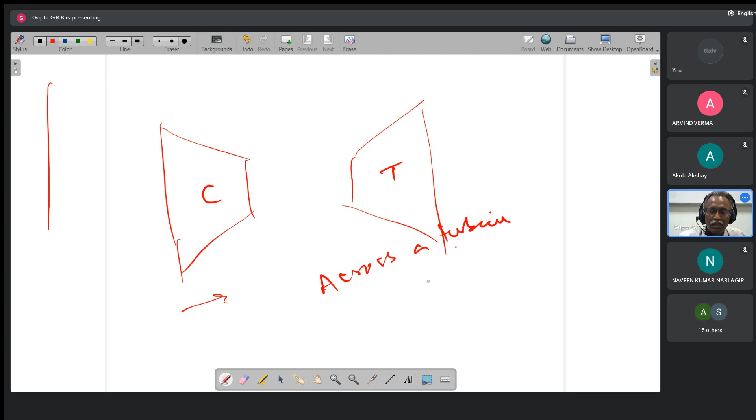So what we have seen is, across a turbine, the area increases because pressure is decreasing and density is decreasing, meaning area will be increasing. And across a rotor, pressure is decreasing and relative velocity will be increasing, so area will be decreasing. Okay, this is the way it comes.

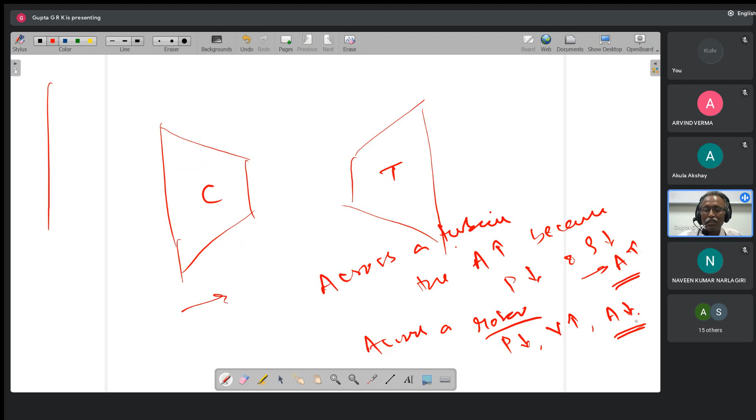Okay, so coming to the velocity triangles, many times we are doing it. So what we do is I am combining the velocity triangles. The base will be the same, so this is U. The large velocity is coming out from the nozzle with C2, and V2 will be like this. So if I complete the triangle like this, the height of the triangle is CA.

So the angles, this is beta 2 for V2, and for C2 this is alpha 2. And if you see the lengths, whirl velocity, this is VW2, the whole one is CW2. That's why U is equal to CW2 minus VW2.

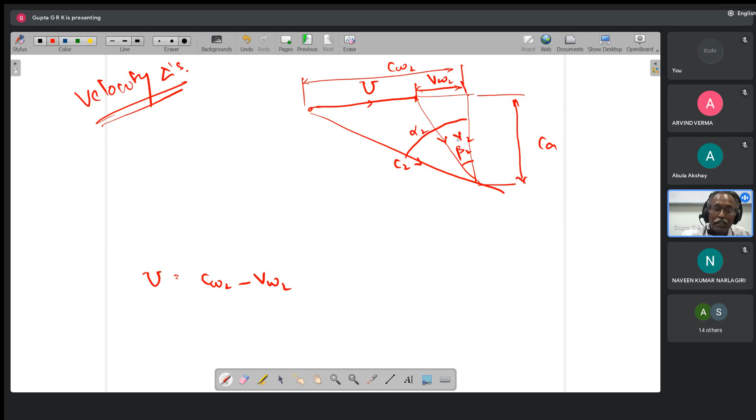Okay, the exit triangle, V2, the relative velocity increases, right? So V2 will be large and V3 will be large and C3 will be small. So V increases, C decreases. And again if I complete the triangle like this, the height again is the same, this is CA only. And again if I take the angles, this is beta 3, the V3 angle, and C3 angle is alpha 3. And again if I see the whirl components, the small one is CW3, and the larger one is VW3. So VW3 minus CW3 also is U.

So from this we can see that CW2 plus CW3 is equal to VW2 plus VW3. If I divide by CA, so U by CA, that is 1 by phi, is equal to U by CA, and CW2 by CA is tan alpha 2, and VW2 is CA tan beta 2. This is equal to tan beta 3. If V is there, beta will come. If C is there, alpha will come. Minus tan alpha. In the same way here, tan alpha 2 plus tan alpha 3 is equal to tan beta 2 plus tan beta 3.

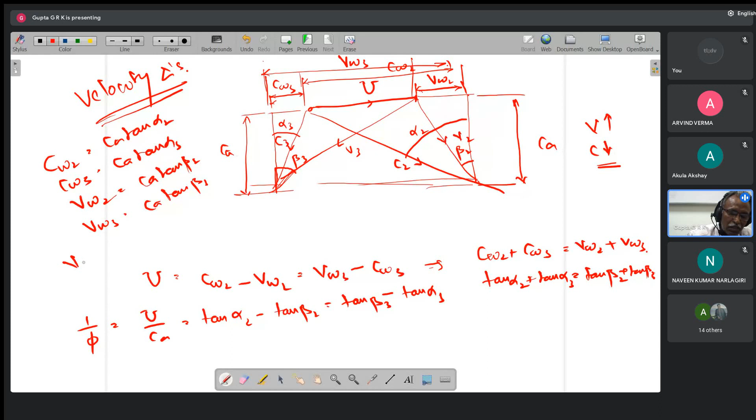Okay, this you have to remember. CW2 is CA tan alpha 2, CW3 is CA tan alpha 3, VW2 is CA tan beta 2, VW3 is CA tan beta 3. In the same way, for velocities, V2 is equal to CA secant beta 2, V3 is CA secant beta 3. Similarly, C2 is CA secant alpha 2, C3 is CA secant alpha 3. Like this, we will get this. This is one relation which we have to remember.

Now coming to work, work is equal to U into change in whirl component. We have seen that it is CW2 plus CW3, and this can also be written as U into VW2 plus VW3. Dividing by CA, sorry, this is equal to U into CA into tan beta 2 plus tan beta 3. This is W. So W is equal to U CA into tan beta 2 plus tan beta 3.

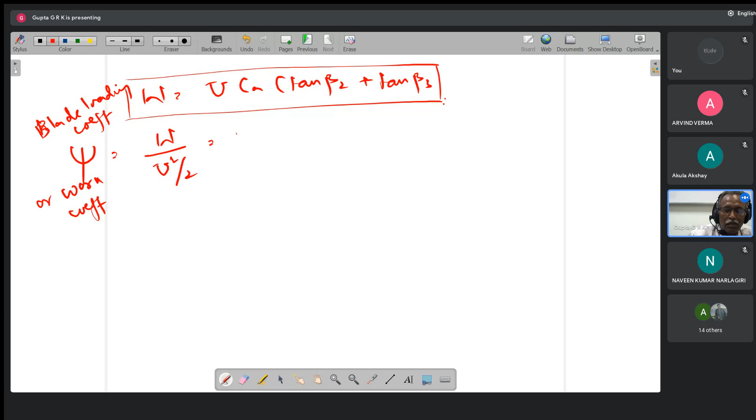And now if I take psi, which is the blade loading coefficient or work coefficient, so W by U square by 2, that is 2W by U square, that is 2UCA by U square into tan beta 2 plus tan beta 3. So one U gets cancelled. So this becomes 2CA by U is phi, into tan beta 2 plus tan beta 3 is equal to psi. Phi is the flow coefficient, which is equal to CA by U. Okay, so this is that, and then next coming to the reaction.

Okay, this is where we left off in the last class. Reaction is equal to delta H across rotor by delta H across stage. So if I take the stage like this, this is stator or nozzle, and this is rotor. So this is 1, this is 2, and this is 3. And another thing we discussed is...

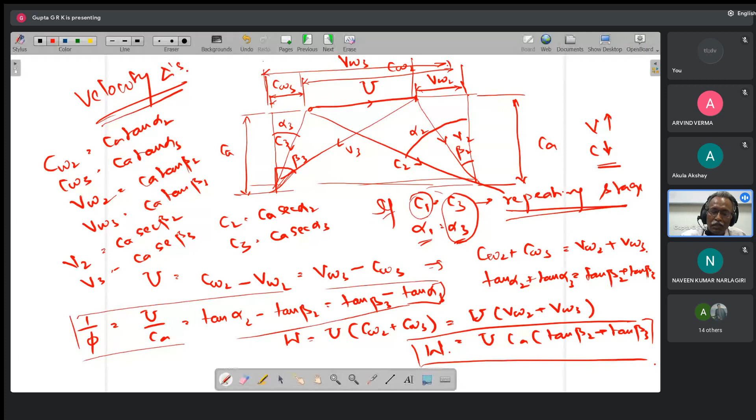If C1 is equal to C3, we call it a repeating stage. This is the velocity, C1 equal to C3, and alpha 1 equal to alpha 3. So the velocity and angle at the first stage nozzle entry is equal to the second stage nozzle entry, which is the rotor exit or next stage nozzle entry. So if the nozzle entry for the first stage and second stage have the same velocity and same angle, it is like a repeating stage. That is the meaning of repeating stage: C1 equal to C3 and alpha 1 equal to alpha 3.

Now coming to this, delta H across rotor is H2 minus H3, and across stage is H1 minus H3. So if C1 equal to C3, and if there are repeating stages, then this can be written as H2 minus H3 by, because C1 equal to C3, I can write H naught 1 minus H naught 3.

And H naught 1 minus H naught 3 is nothing but W, because W is equal to H naught 1 minus H naught 3 plus Q, the change in total stagnation enthalpy. So which is nothing but change in enthalpy plus change in kinetic energy, the change in stagnation enthalpy, so this H naught 1 minus H naught 3.

Okay, I have written something wrong, let me write it the other way. Q is equal to H naught 3 minus H naught 1 plus W. So W is equal to H naught 1 minus H naught 3. This is the way, this is first law. So this can be written as W.

And H2 minus H3 across a blade: H3 plus V3 square by 2 is equal to H2 plus V2 square by 2. With respect to the blade, there is no... this is the difference I actually have to understand. So if I take H3 plus V3 square by 2...

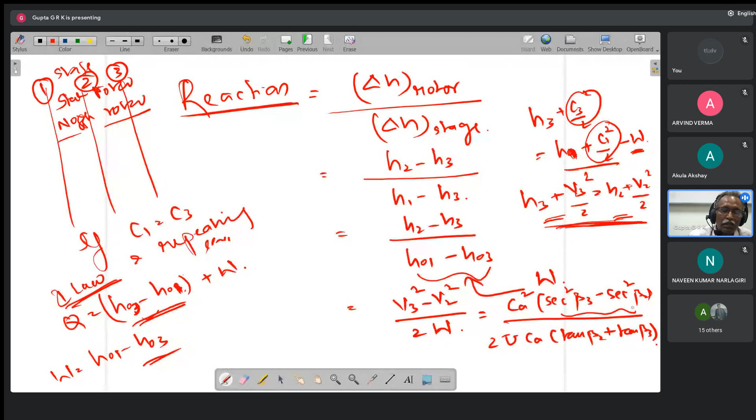So reaction is equal to Ca square into tan square beta 3 minus tan square beta 2 by 2U Ca into tan beta 2 plus tan beta 3. If I write this as A plus B into A minus B, one Ca gets cancelled, so Ca by U is phi, Ca by 2U into tan beta 3 minus tan beta 2. This can also be written as phi by 2 into tan beta 3 minus tan beta 2. This is R.

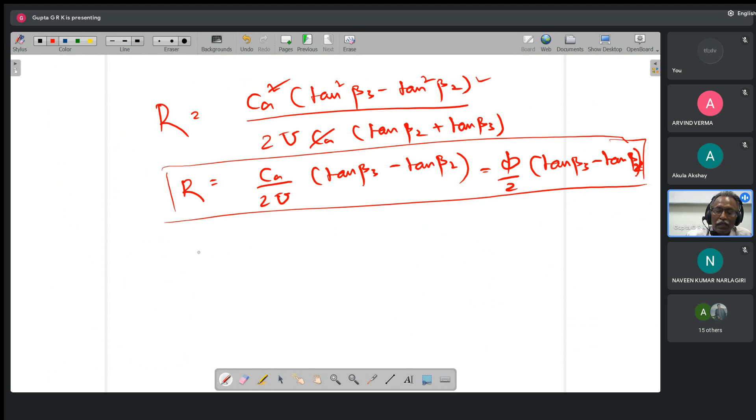So we have again the R, phi, psi relation, right? And the other thing we can write is R is equal to... Ca tan beta 3 is VW3, Ca tan beta 2 is VW2, by 2U. Later I will show you that VW3 minus VW2 by 2 is VWM by U, and this becomes actually Ca tan beta M.

Just like in axial compressors, we get a similar thing. So here we got the psi relation: psi is equal to 2 phi into tan beta 2 plus tan beta 3.

And R is equal to phi by 2, tan beta 3 minus tan beta 2. So now from these two, if I have r, phi and psi, I can solve for tan beta 2 and tan beta 3. So how can we do that? Tan beta 3, tan beta 2 plus tan beta 3.

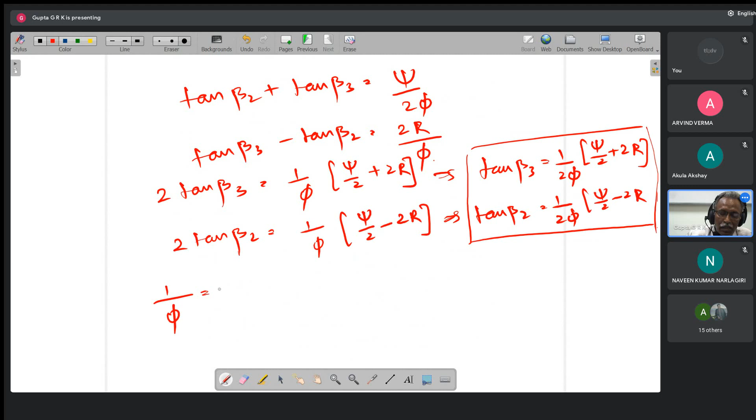1 by phi, we already got it as tan alpha 2 minus tan beta 2. And this is also equal to tan beta 3 minus tan alpha 3. So this is the thing I have.

So from tan alpha 2 minus tan beta 2, tan alpha 2 is equal to tan beta 2 plus 1 by phi. And from the other one, tan alpha 3 is equal to tan beta 3 minus 1 by phi.

So yes, we are doing all calculation at mean radius only. So again, if I want to get any other radius, I have to go for radial equilibrium again. Yes, so all mean radius design.

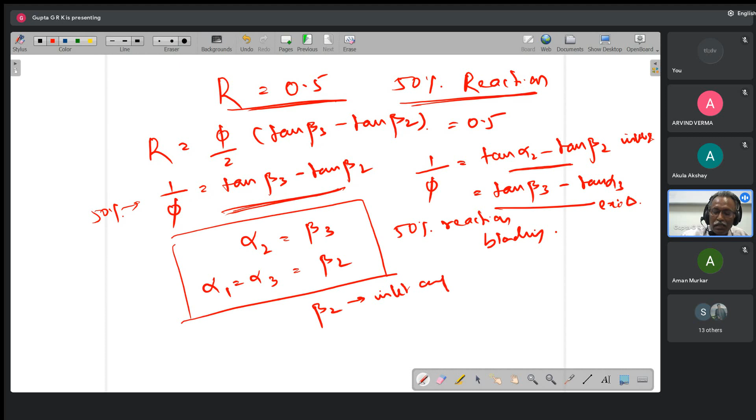Okay, and here beta 2 is inlet angle for rotor, and alpha 3 is inlet angle to the nozzle or stator, right? So both inlet angles are same. Similarly, beta 3 is exit angle of rotor, and alpha 2 is exit angle of nozzle.

Because for nozzle it is entering at C1 and leaving at C2. So leaving angle is alpha 2. So like this, exit angles are same, inlet angles are same. Therefore, stator and rotor blades are same.

So that is the one we conclude the same thing at compressors also. And now here, so what we do is, okay, I will show you all these things.

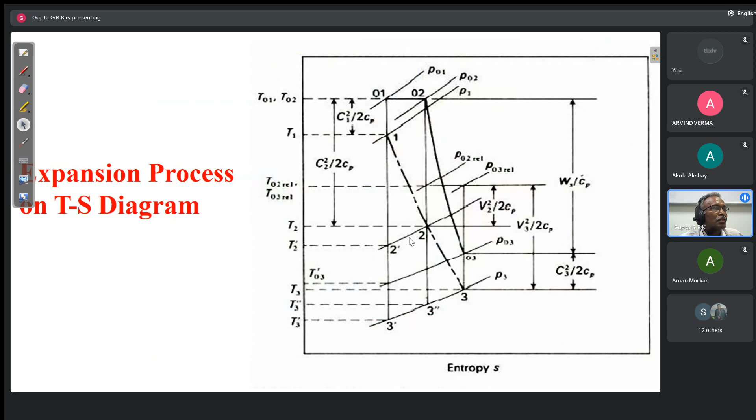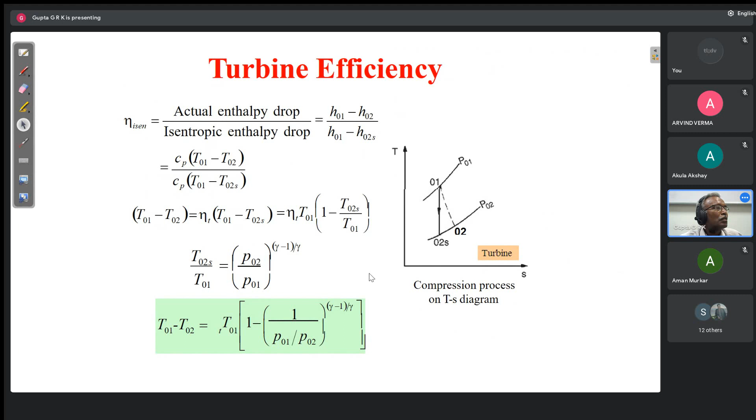This already we know about it, and these are the combined velocity triangles. These are the relations we have developed now. This already we know from the gas turbine cycles, right? So if I know the change in total temperature across the stage is equal to, if in terms of pressure ratio, it is like this.

So W is equal to Cp delta T naught S, already we know it, we have discussed. And total to total efficiency, total to static efficiency, that also we will discuss when I draw the TS diagram.

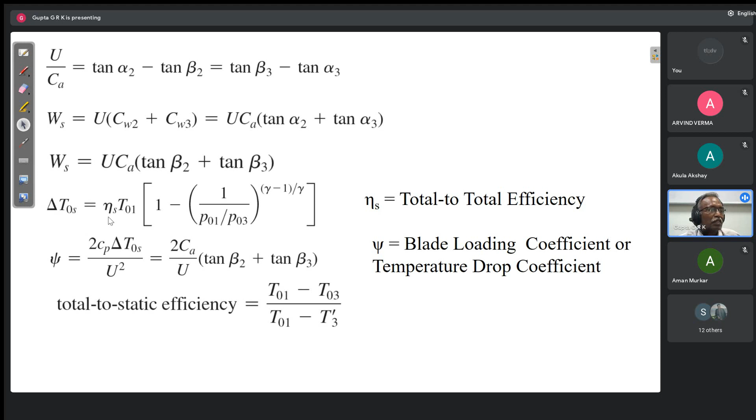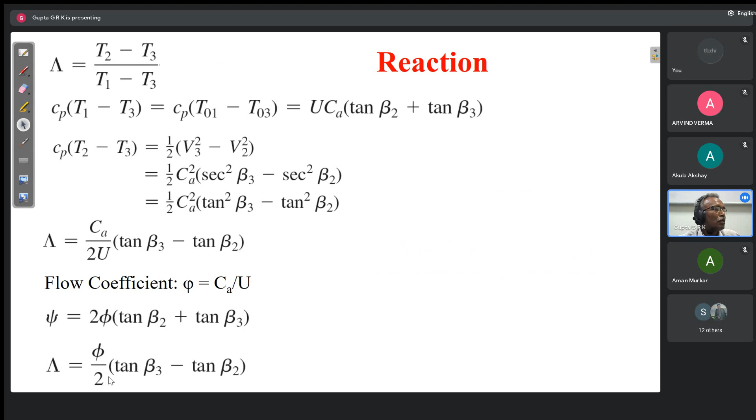This is the reaction, so Ca by 2U into tan beta 3 minus tan beta 2. So if phi is this, psi is equal to 2 phi into tan beta 2 plus tan beta 3, R is equal to phi by 2 tan beta 3 minus tan beta 2. So we have solved these two, and we got tan beta 3 is 1 by 2 phi times psi by 2 plus 2R, psi by 2 minus 2R, and these things we have derived.

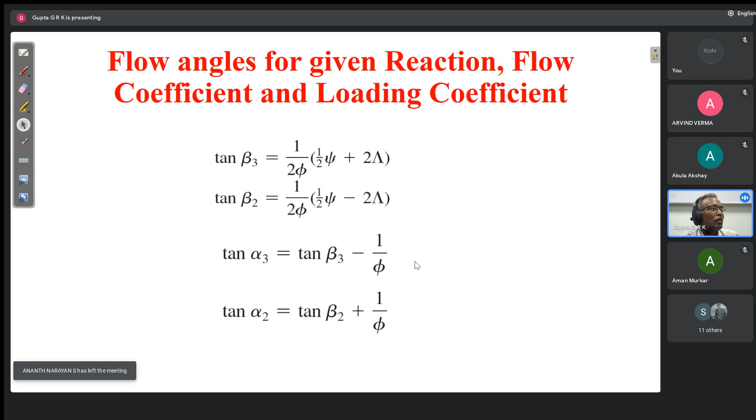And for 50% reaction, beta 3 equal to alpha 2, beta 3 equal to alpha 3, these things also we have discussed. And so for 50% reaction, we have derived this particular formula.

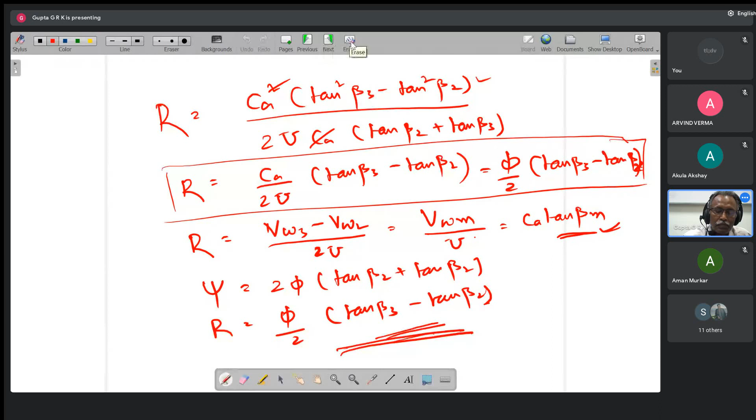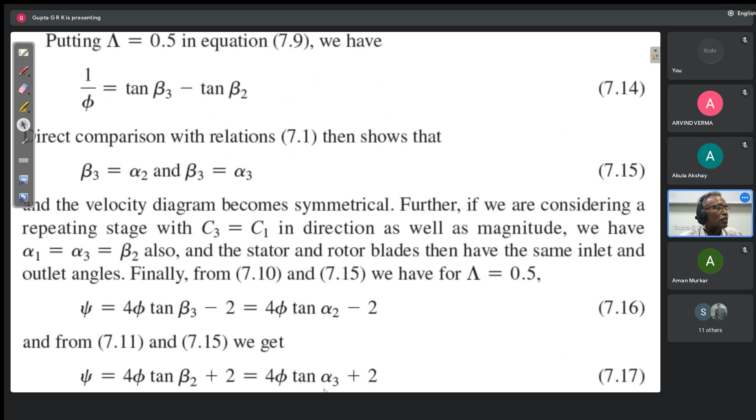And from the second relation, we get psi is equal to 4 phi tan alpha 3 plus 2. So like this, we can get the relation. Actually, tan beta 2 will come, so I can write it as tan alpha 3. So these are the two relations I can devise. So if I know psi and phi for different values of psi and phi, this tan beta 2 is written as tan alpha 3, I will get this relation.

And now if I draw the variations, so flow coefficient here phi and psi here, for different values of phi and psi, I can draw the variations of angles. So that is alpha 2 equal to beta 3, 80 degrees, 70 degrees, 60 degrees like that. Alpha 3 equal to beta 2, which is 10 degrees, 20 degrees, 30 degrees like that. I can draw this. So this is for 50% reaction stage design, and we will get the variations in this form.

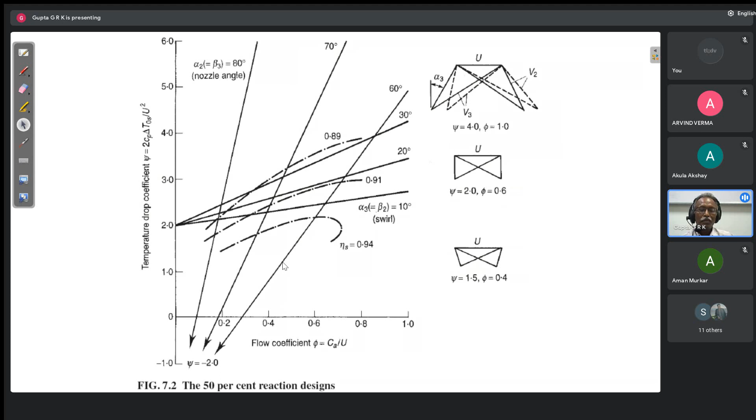And then one more thing I like to do, which is not there here, is again non-dimensional velocity triangles we discuss. So again, I draw the triangles.

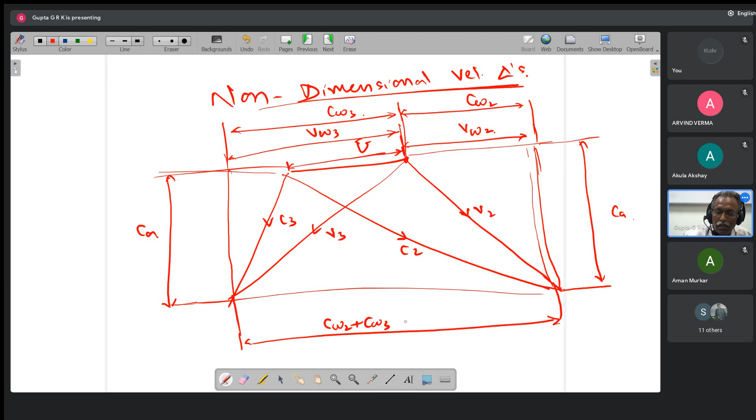So if I take this total distance, what is this total distance here? You can write this as CW2 plus CW3 or VW2 plus VW3. Am I right? Okay, so again, if I take non-dimensional velocity triangles, that is dividing everything by U, CW2 by U, VW2 by U, CW3 by U, VW3 by U, C3 by U, V3 by U, C2 by U, V2 by U, Ca by U, like this.

So now we can see the height of the triangle CA by U is nothing but phi. Again, the distance between these apexes of the triangle, CW2 plus CW3 by U, VW2 plus VW3 by U, this is equal to psi. It is not exactly psi. Actually, it is psi by 2U or 2 psi. How do we define it? Psi is equal to W by U square by 2, right? So this is...

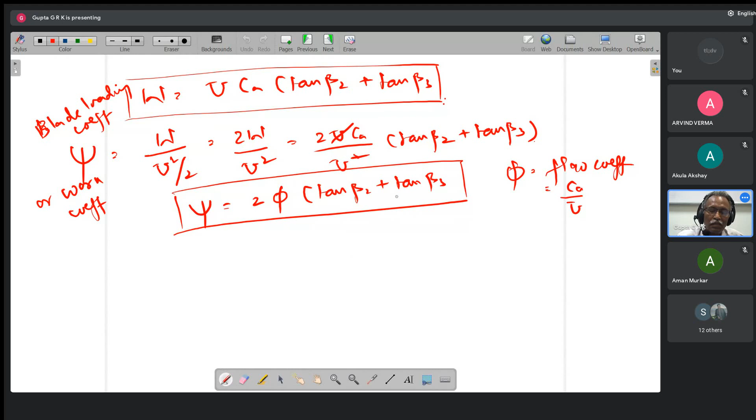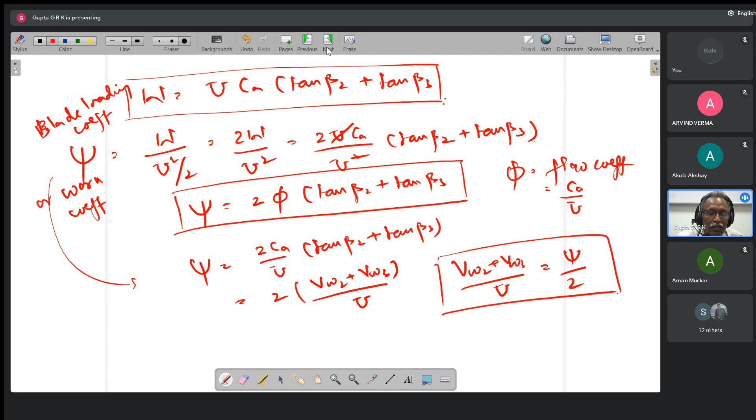So from here, psi is equal to 2 Ca by U into tan beta 2 plus tan beta 3, right? So that is 2 by... so this is Ca tan beta 2 is Vw2, Ca tan beta 3 is Vw3, by U. So Vw2 plus Vw3 by U is equal to psi by 2. Am I right? So there, the distance between the apexes of the triangles, so this is psi by 2, right? This is psi by 2.

Anyhow, this represents the blade loading coefficient. And again, if I take a center point here, and if I join this, because VW2 is this way, VW3 is this way, I will take this as VWM. So that goes through the center point here. And this angle, this is beta 2 for V2, and this is beta 3 for V3, and this is called beta M. And so this is VWM. So how will you get VWM? This distance is VWM.

Okay, so if I take this distance from this point to this point, because the total is VW2 plus VW3, half the distance is VW2 plus VW3 by 2. And in that I have to subtract this particular portion. If I subtract this particular portion, this portion I will get. So minus VW2 by... what will I get here? VW3 minus VW2 by 2.

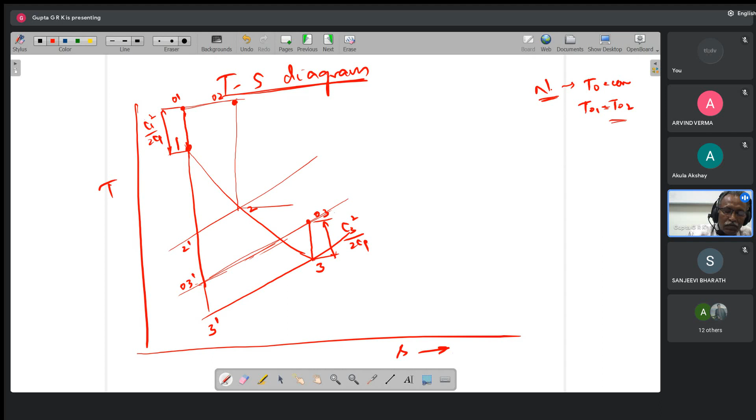Because across the nozzle, T naught is constant. So T naught 1 is equal to T naught 2. Across the nozzle, T naught 1 equal to T naught 2. So if I draw a horizontal line, and at T2, if I draw a vertical line, this will be naught 2. And this will be C2 square by 2Cp. So you can see that C2 will be large because kinetic energy will be large after the nozzle. And 2 to 3, naught 2 to naught 3, this is across the rotor, this is the expansion.

Okay, so this is the way it is happening. And if I take relative velocities, so at T3, if I add, because V3 will be large, V3 square by 2Cp, if I add, this will be naught 3, maybe somewhere it comes to naught 3 relative. I will write naught 3 relative. T3 plus V3 square by 2Cp. And across the rotor, T naught 2 relative is equal to T naught 3 relative.

Okay, so if I draw a horizontal line here, this will become naught 2 relative, and this distance will be V2 square by 2Cp.

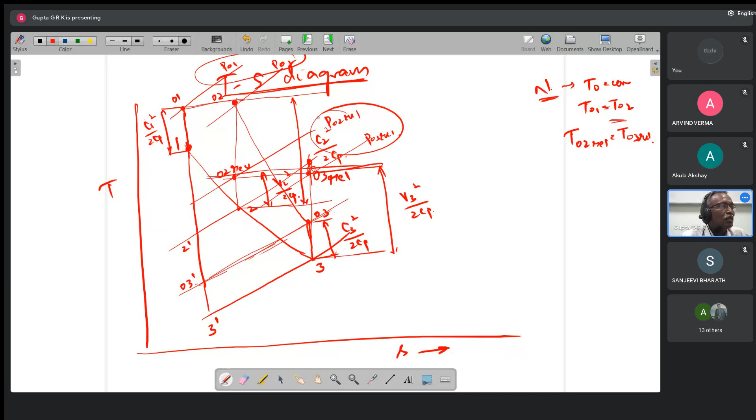Okay, so P naught 2 relative, P naught 3 relative, and similarly P naught 1, P naught 2. This is the total pressure loss. This is total pressure loss across the nozzle, and this is total pressure loss across the rotor: P02 relative minus P03 relative.

So here, these loss coefficients, we define two types of loss coefficients: in terms of temperatures we name it lambda, in terms of pressures we name it y. Total pressure loss coefficient, like that we have defined, right? So across nozzle I will have lambda n, yn. Across rotor, I will have lambda r and yr.

Okay, so if I take lambda n, across the nozzle, this is the one. The losses are T2 minus T2 dash, due to friction, and T02 minus T2 is the actual inlet energy, so C2 square by 2Cp, which is nothing but T02 minus T2. This is lambda n.

If I take yn, so what is the total pressure loss? P01 minus P02, by the thing available, which is P02 minus P2. So this is like: T2 minus T2 dash by C2 square by 2Cp, and P01 minus P02 by P02 minus P2.

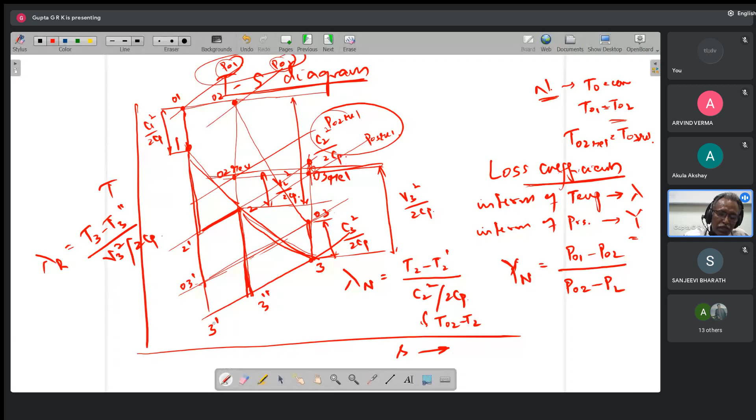What is double dash? Some name, okay. Because it is coming like this and it has to come like this, instead of writing it again, because already 3 dash I have written, I am writing 3 double dash. So across the rotor, this is ideal, this is real. Am I clear? Yes, okay.

So similarly, YR, and again the loss is P02 relative minus P03 relative by P03 minus P3... I think P03 relative minus P3. Yeah, P03 relative minus P3. So these are the loss coefficients in terms of temperature and pressure, across rotor and across nozzle.

So next, what we are going to do is derive the efficiency. So efficiency is equal to, and T01 minus T03 is the actual one, over T01 minus T03... okay, so this is not... that is the way we define the total to total efficiency.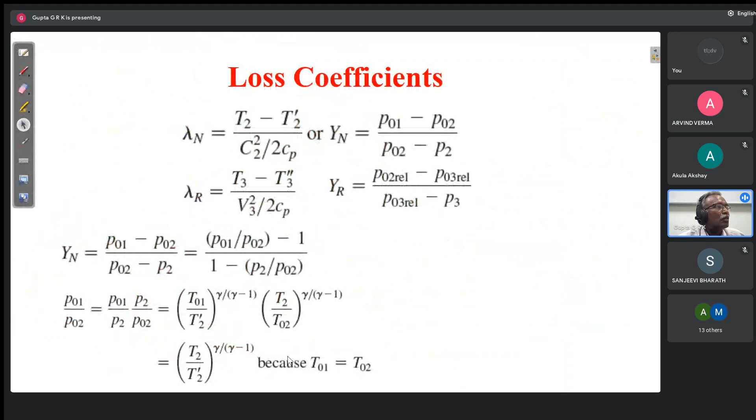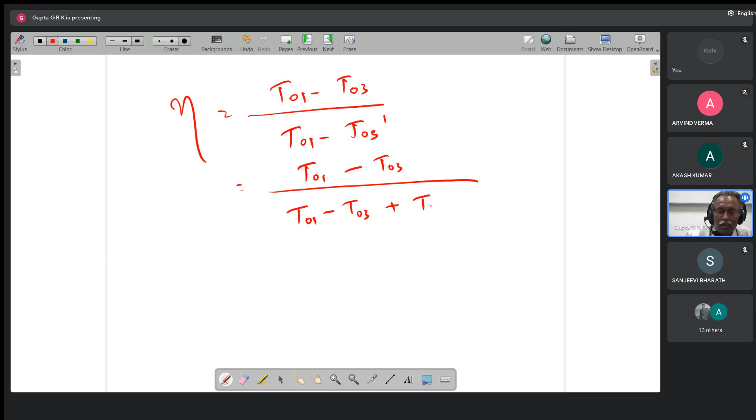T01 minus T03 by T01 minus T03 dash. So divide the numerator and denominator by T01 minus T03. So I'm going to get 1 by 1 plus T03 minus T03 dash by T01 minus T03. So here, what it is done is, this I will write as T01 minus T03 plus T03 minus T03 dash.

I am adding and subtracting T03. So this will become numerator and denominator, you divide by T naught 1 minus T naught 3. So T naught 1 minus T naught 3 by T naught 1 minus T naught 3 is 1, and again dividing these by T naught 1 minus T naught 3, it will become 1 plus T naught 3 minus T naught 3 dash by T naught 1 minus T naught 3.

Okay, this is the way we will write. And so here, T naught 3 minus T naught 3 dash, I am going to take this particular term. This term is nothing but work, W by Cp. This is W by Cp, and this one I will do some manipulation.

T naught 3 minus T naught 3 dash is equal to, I will write this as T3 minus T3 dash, approximately. And this T3 minus T3 dash is equal to the sum of these small pieces: T3 minus T3 double dash, plus T3 double dash minus T3 dash.

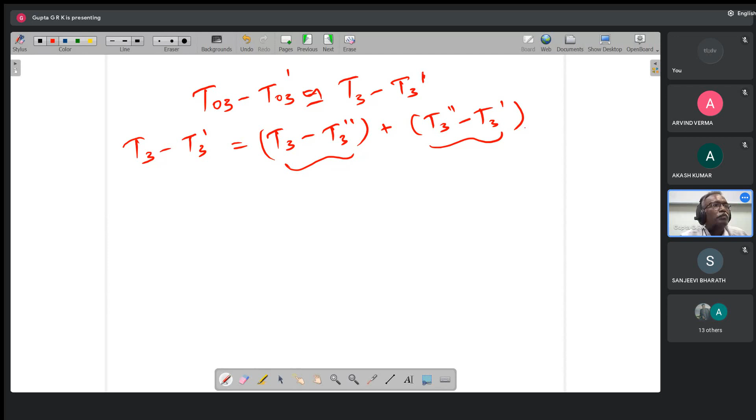So this is written like T naught 3 minus T naught 3 dash is written as T3 minus T3 dash, and again as sum of T3 minus T3 double dash plus T3 double dash minus T3 dash. And then what we do is...

So if I take this line and this line, these two are under the same constant pressure lines. Because pressure ratio is same, temperature ratio will be same, that is T2 dash by T3 dash is equal to T2 by T3 double dash. T2 dash by T3 dash...

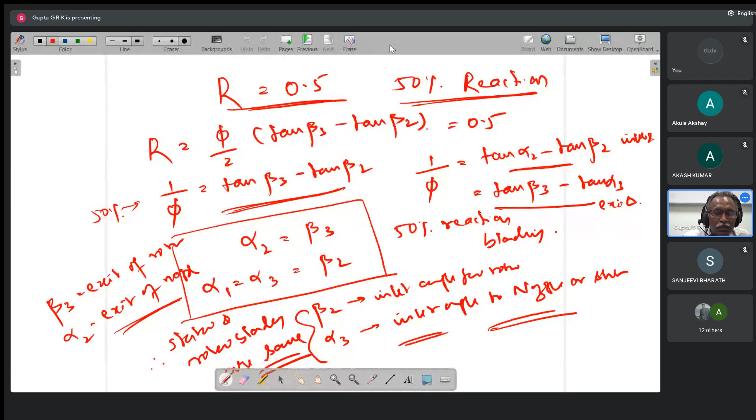Like this, and this can be written by cross changing. I can write this as T3 double dash by T3 dash is equal to T2 by T2 dash. Subtract 1 from both sides, and I'm going to get T3 double dash minus T3 dash by T3 dash is equal to T2 minus T2 dash by T2 dash.

Why I am writing all these things is, I want to express the efficiency in terms of the loss coefficients and the angles, like this. So this is what I am interested in.

T3 double dash minus T3 dash is equal to T2 minus T2 dash into T3 dash by T2 dash. And this, again, I make a small approximation. I will write this as T2 minus T2 dash into T3 by T2. So this is the way I write it.

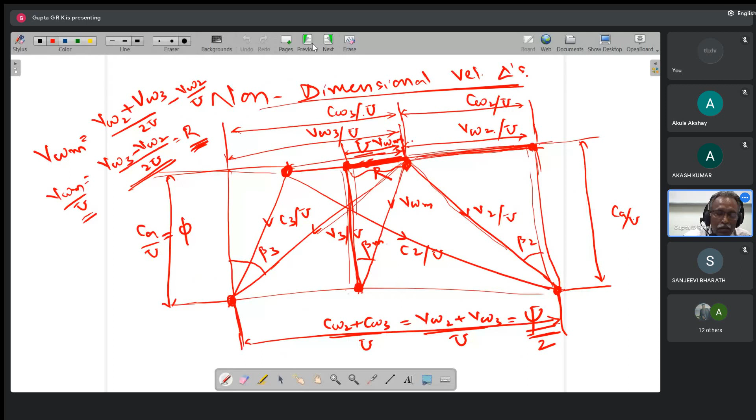Now going back to the efficiency, we got this as 1 by 1 plus T naught 3 minus T naught 3 dash.

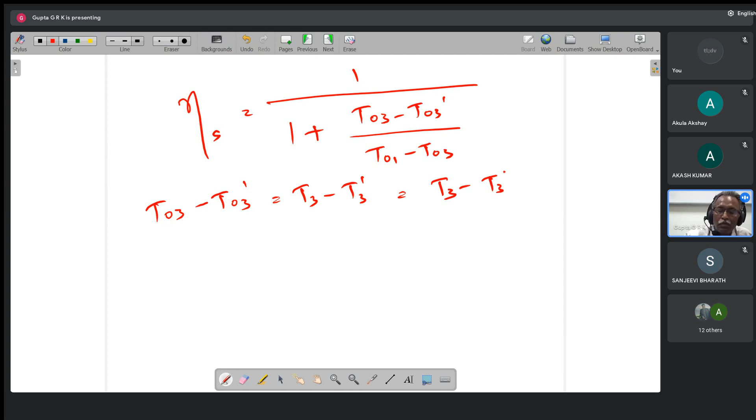And this we have written T naught 3 minus T naught 3 dash as T3 minus T3 dash minus T3 minus T3 double dash minus T3 double dash minus T3 dash, like this we have written. And now this T3 double dash minus T3 dash, I have to substitute.

So T3 minus T3 double dash is equal to T2 minus T2 dash into T3 by T2. Okay, this I have to substitute. And so here, if you see the figure from the previous formula...

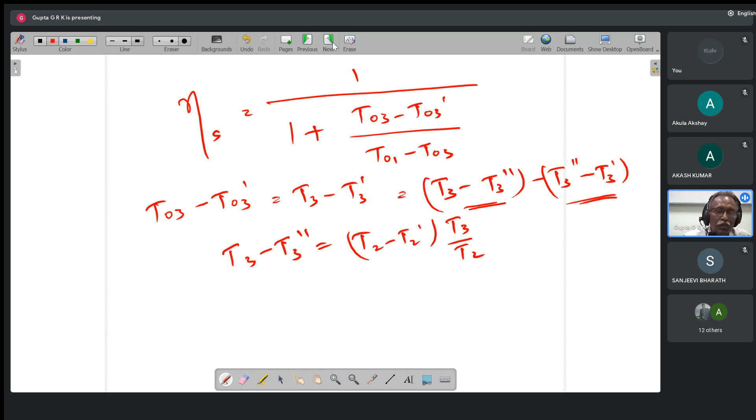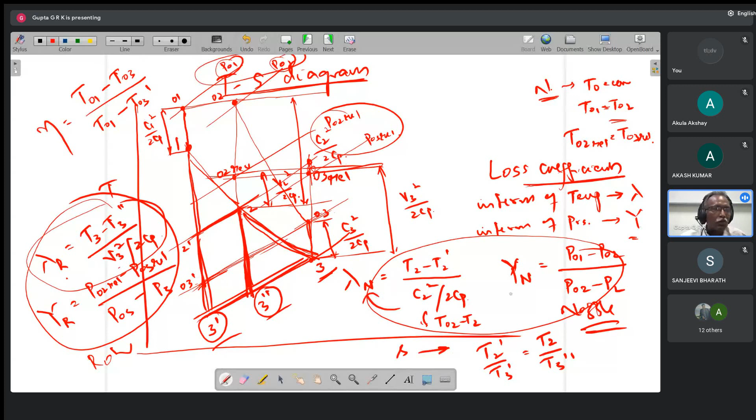So now this T3 minus T3 double dash is equal to lambda r into V3 square by 2Cp. Similarly, T2 minus T2 dash is lambda n into C2 square by 2Cp. So those things I have to substitute.

So now I will take this here. So 1 plus T3 minus T3 double dash into this, okay, so this one is there. And this T3 minus T3 double dash is lambda r into V3 square by 2Cp, and T2 minus T2 dash is lambda n into C2 square by 2Cp. And I will get this particular formula.

And once I get this, V3 we know is C A secant beta 3, and C2 is C A secant alpha 2, if I substitute there. And this T01 minus T03 is W by Cp. So if I substitute here, this particular one, I'm going to get the stage efficiency, this particular formula.

So you just practice it and derive this stage efficiency. If there is any difficulty, we will discuss in the next class. Is it okay till now?

Yes sir. Okay, a little bit of mathematical manipulation. You see the figure and step by step you write it. If you derive it, you will get it. Any difficulty with this?

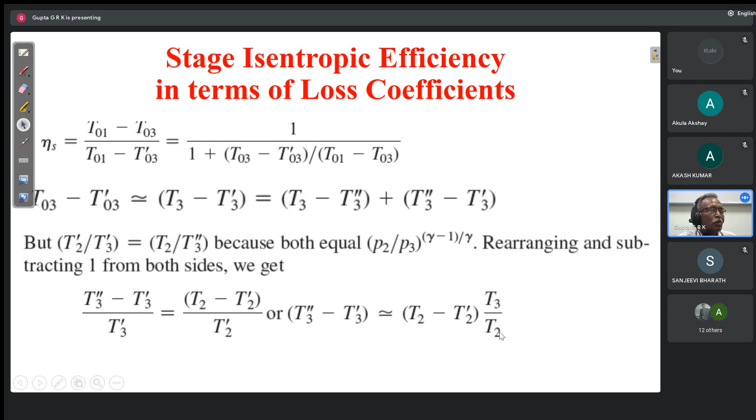Only assumption that we have made here is this T3 dash by T2 dash we have written as T3 by T2, that is one approximation we do here. So here if I take T3 dash to this side, T3 dash by T2 dash will come, but that is approximated here as T3 by T2. That is the only approximation we have done.

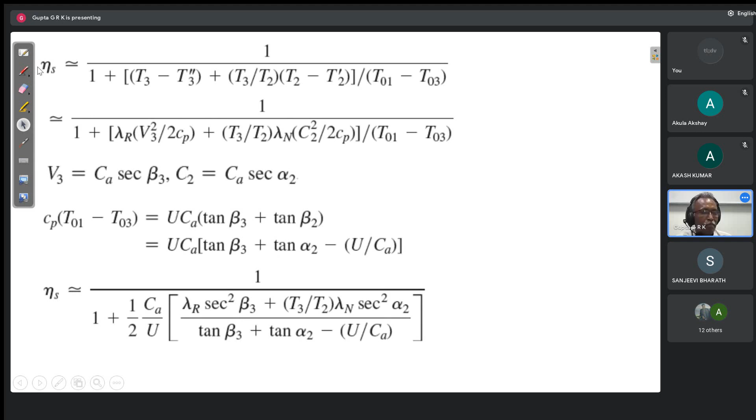Okay. Yes sir. So once you understand, then we will go for the story today.

And it is a beautiful story. Actually, if it were an offline class, we would have discussed it. Okay, one thing I will ask you, just like that.

Can a person become rich without cheating or exploiting other people? Sir, rich in the sense of money, sir? Rich in money only, okay, it's purely material things. Money only.

Can you become a very rich person without exploiting or deceiving or cheating other people? Yes sir, it could be possible. Okay, how can it be possible? He can do business in a fair way. Okay, if you want to become rich, you have to make profits, right? Yes, sir. So the more profits you try to make means you are trying to exploit the weakness or needs of the other people, right?

It cannot be such type of exploitation, sir. It can be somewhat a strategical thing. Yeah, but usually that is the general understanding, right? A person becomes rich means naturally is exploiting the weakness of other people like that.

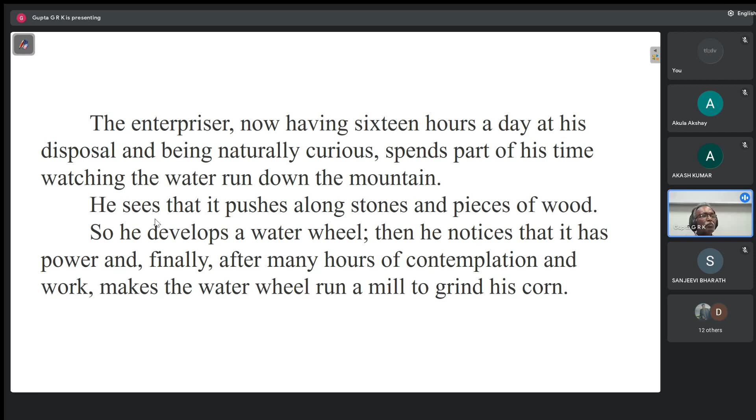And finally, after many hours of contemplation, thinking, and work, he makes the water wheel run a mill to grind his corn. So he can make a flour mill to grind his corn. And this 100th man then realizes that he has sufficient power to grind corn for the other 99 also, because he is continuously getting power.

So he says to them, I will allow you to grind your corn in my mill if you will give me one tenth of the time you save. For grinding corn they are spending a lot of time, and you can save that time and give me one tenth of it. And they agreed happily because it is like win-win. They also gain time, and he also gets work from them.

So they agree, and the enterpriser now makes an additional profit. He uses the time paid by the 99 others to build a better house for himself, to increase his conveniences of living through new benches, openings in his house for light, and better protection from the cold. Now he has a luxurious building and stay.

So it goes on. As this 100th man constantly finds ways to save the 99 the total expenditure of their time, one tenth of which he asks of them in payment for his enterprising. So he saves a lot of time for them and gets little time from them. And this 100th man's time finally becomes all his own to use as he sees fit.

He does not have to work unless he chooses to. His food, shelter, and clothing are provided by others. His mind, however, is ever working, and the other 99 also are constantly having more time to themselves because of his thinking and planning. Now they also have a comfortable life, some peaceful time, because of this person's thinking and planning.